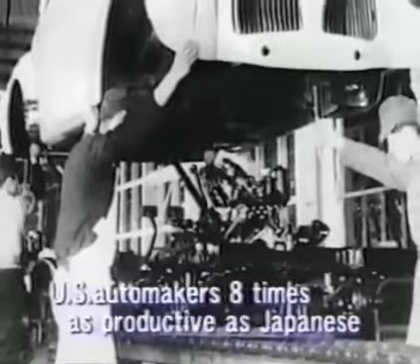After the war, Kiichiro passed on his dream to his cousin Eiji. He instructed Eiji to bring the company up to U.S. standards of technology within 3 years. That was a daunting task. U.S. productivity in automobile manufacturing was 8 times higher than Japan's, and Toyota was short of equipment and capital.

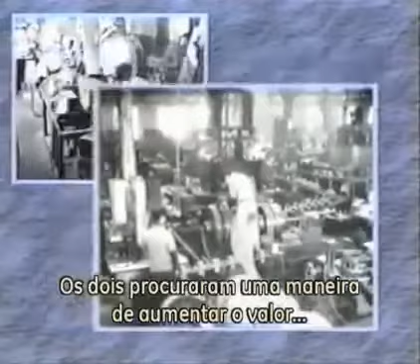So raising productivity was a pressing issue. Eiji assigned a machine shop manager by the name of Taiichi Ohno to develop a more efficient production system. The two men looked for ways to raise the value-added productivity of every worker. They did that by putting Sakichi's Jidoka concept to work throughout their operations.

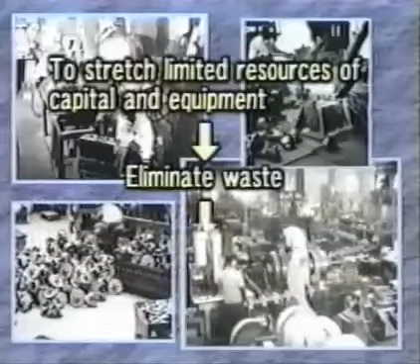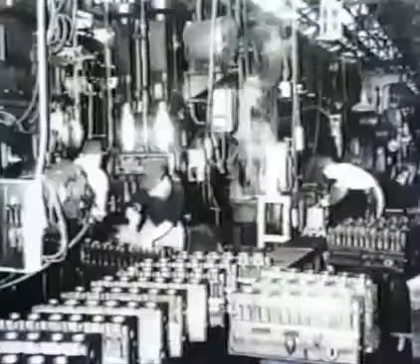They also looked for other ways to stretch their limited resources of equipment and capital. They did that by putting Kiichiro's just-in-time concept to work systematically. Ono took a cue from the U.S. supermarket. He made each process the customer for the preceding process.

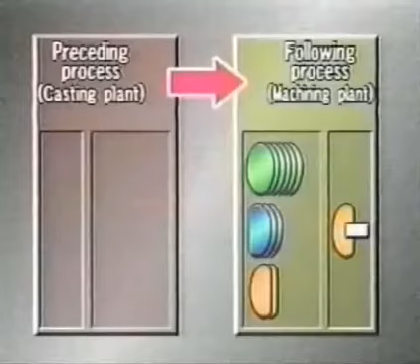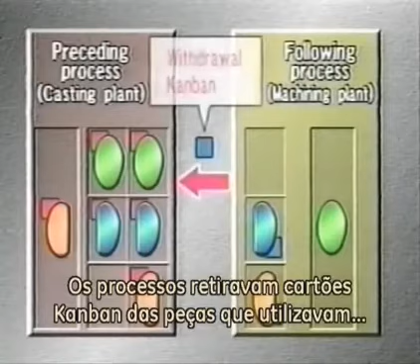In traditional manufacturing, processes delivered parts to the following processes regardless of what was actually needed. Ono devised a completely new kind of system. Processes used Kanban cards removed from parts they had consumed to withdraw parts from the preceding processes.

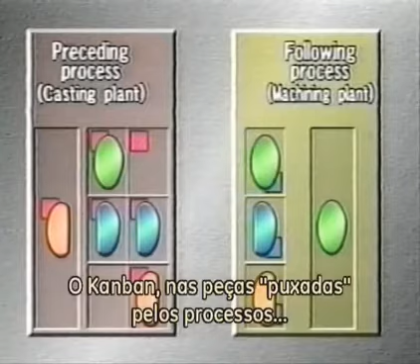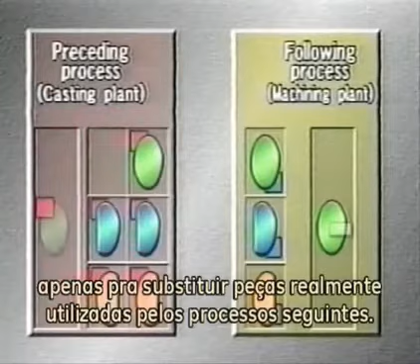Kanban on the parts arrayed by processes came off when the following processes withdrew the parts. They became instructions to make additional parts. The Kanban flow ensured that processes made parts only to replace parts actually consumed by the following processes.

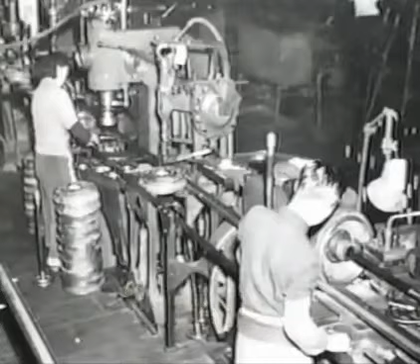Active cooperation by the people in the workplace would be essential to Ono's system. But at first, people were reluctant to give up their old ways of doing things. Ono took the initiative. He went into the workplace and taught people how to use his system. Eiji Toyota supported Ono enthusiastically in putting the new production system in place.

A new production system gradually took shape on the foundation of just-in-time manufacturing and Jidoka intelligent automation. As the Toyota production system, it became a standard for manufacturing industries. The Toyota production system gained global attention after the oil crisis of 1973. Toyota recovered more quickly than other automakers from the crisis, and its production system received much of the credit for that resilience.

General Motors Corporation approached Toyota about setting up a joint venture to make small cars in the United States. The two companies set up New United Motor Manufacturing Incorporated in California in 1984. Differences in language and culture presented big challenges, but the spirit of making things well knows no borders.

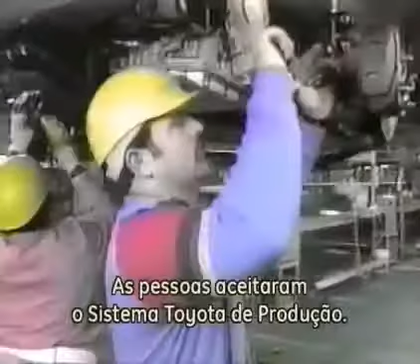People accepted the Toyota production system, and the Toyota-GM joint venture became the highest-ranked automobile plant in the United States for quality. It became a symbol of successful industrial cooperation between Japan and the United States. A book published by the Massachusetts Institute of Technology hailed the Toyota production system as the machine that changed the world.

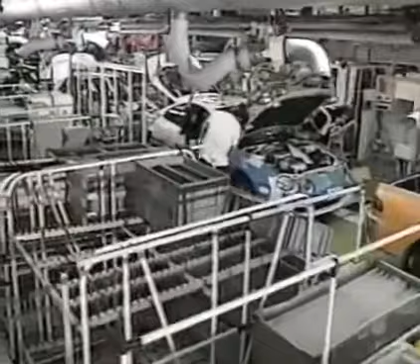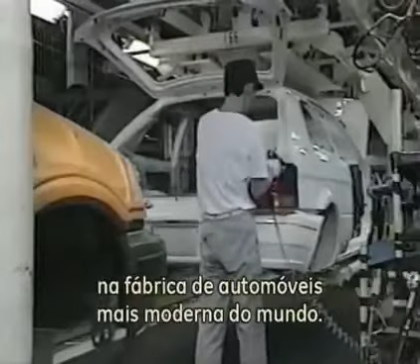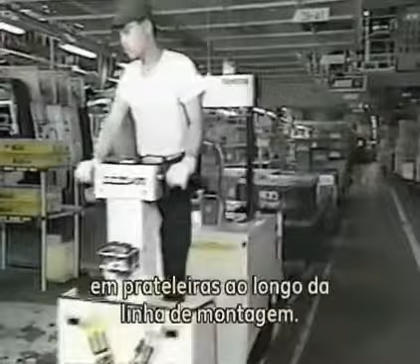Today, the Toyota production system has gained a worldwide following. Let's see how the system now operates in the world's most modern automobile plants. The trucks that deliver parts to the plants carry a variety of items in each load. That allows each truck to travel fully loaded, which minimizes trips and thus reduces traffic congestion. Forklifts carry the parts unloaded from the delivery trucks to racks alongside the assembly lines.

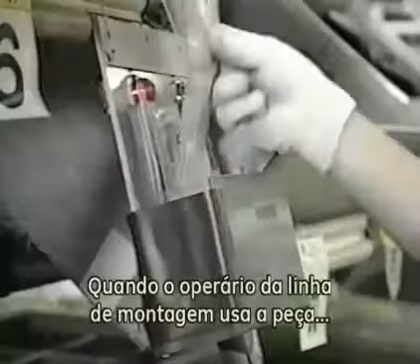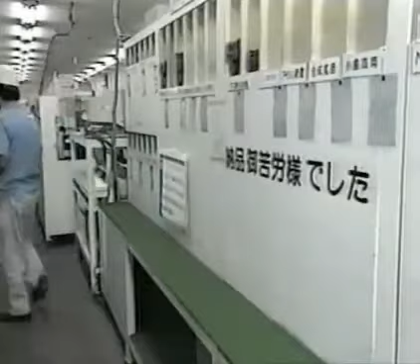When people on the assembly line use the parts, they remove the attached Kanban cards. The Kanban get picked up regularly and sorted. The delivery truck drivers pick up the Kanban for their company or companies before leaving. Back at the supplier's plants, the Kanban become orders for withdrawing additional parts. Sorting arranges the Kanban according to area in the plant.

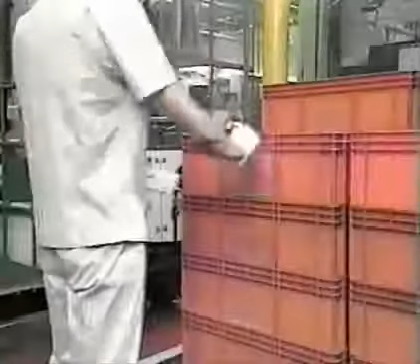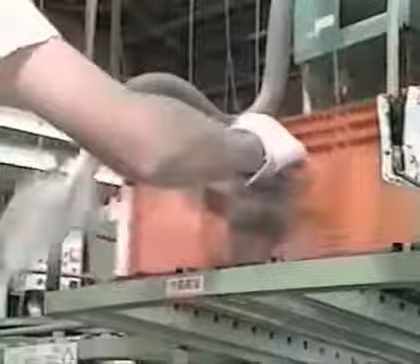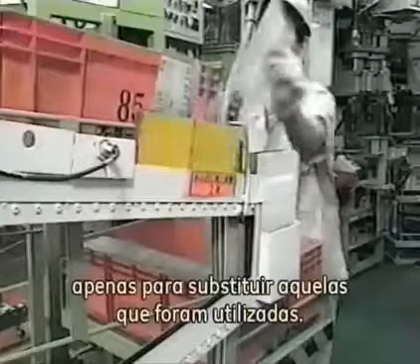Shipping personnel exchange the Kanban and empty boxes for full boxes. The production processes in the plant make additional parts only to replace parts that have been withdrawn. That prevents the wasteful buildup of inventories. When the shipping personnel have gathered a full truckload of parts, a truck carries the parts to the vehicle plant.

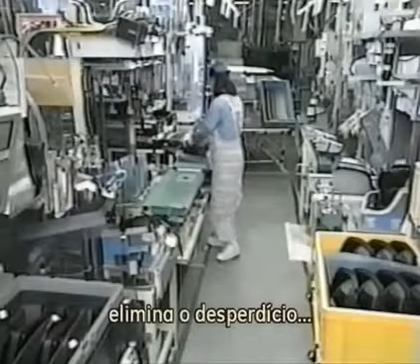Kanban thus link Toyota plants with suppliers' plants, as well as linking the processes inside the Toyota plants. Just-in-time manufacturing minimizes inventories, eliminates waste, and maximizes productivity at all the plants that participate in the Toyota production system. Jidoka intelligent automation also continues to play a big role in the system.

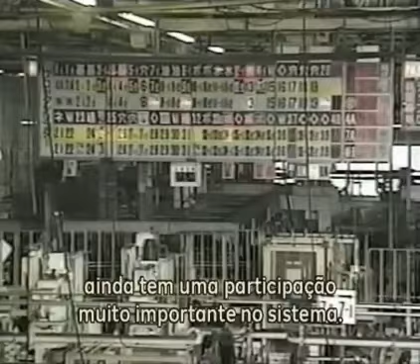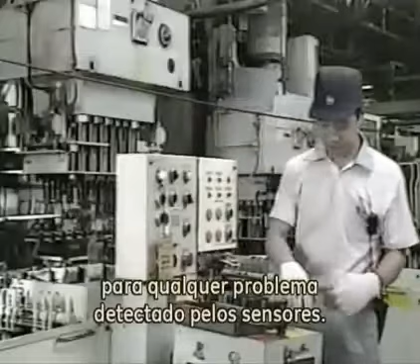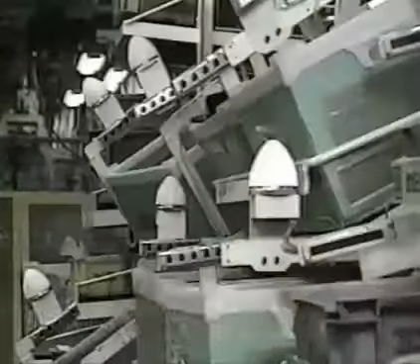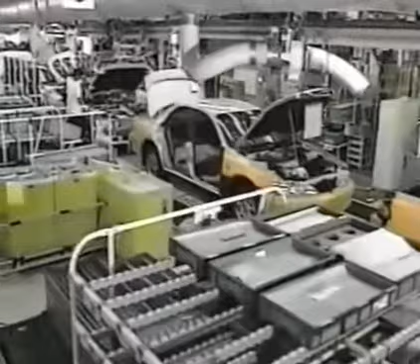On automated machining lines, numbered lamps light up to call attention immediately to any problems detected by sensors. On assembly lines, the employees themselves have devised countless Jidoka measures to prevent defective work. So Sakichi's concept continues to prevent waste. The idea is to build quality assurance into every process, and it works.

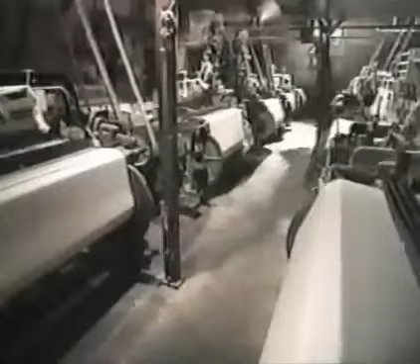The foundation for the Toyota production system has been established by Sakichi's Jidoka intelligent automation and his son Kiichiro's just-in-time manufacturing. Taiichi Ohno and others put those concepts to work systematically with the strong support of Eiji Toyota and his passion for manufacturing.

The Toyota production system continues to evolve in response to changing needs and circumstances, but the fundamental concepts are eternal, including Toyota's commitment to continuing improvement in every phase of products and operations. Those concepts underlie a lasting contribution to enhancing the quality of life for people everywhere.